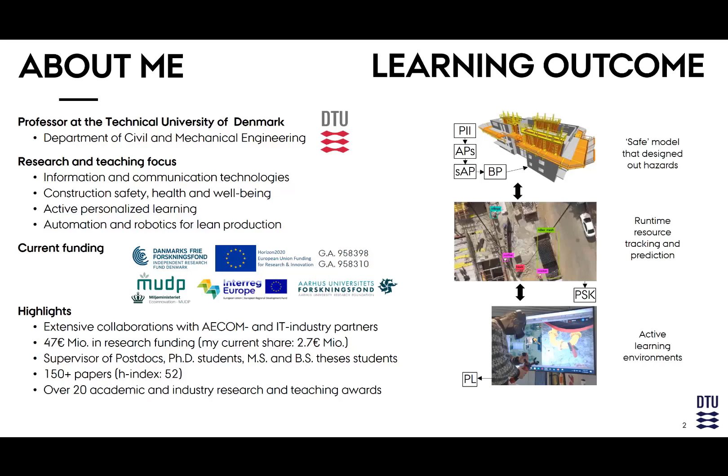I have achieved my learning outcome today if I get three key messages across. One is prevention through design and planning. Second, proactive feedback. And third, active learning environments.

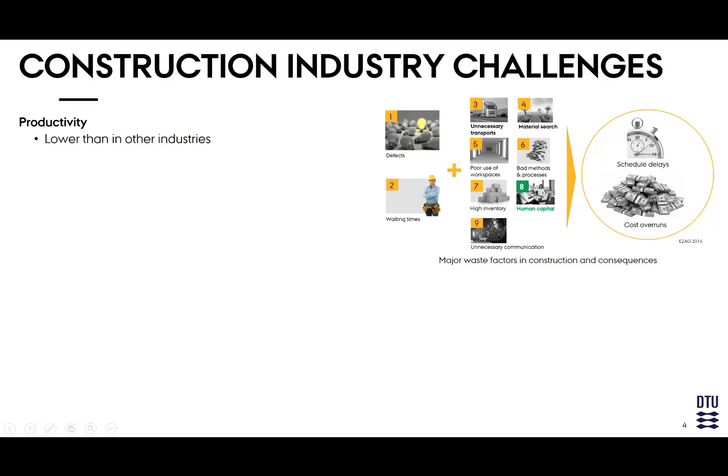The motivation for my research is multifaceted. The industry faces challenges, and I'm not going into those details about productivity, emissions and waste, an aging workforce. But mostly related to this presentation is the content and the methods that we have available for work. The current safety management practices are not really built for the digital world that we live in. They're stale, they're static, they're often not meant for interdisciplinary work experiences.

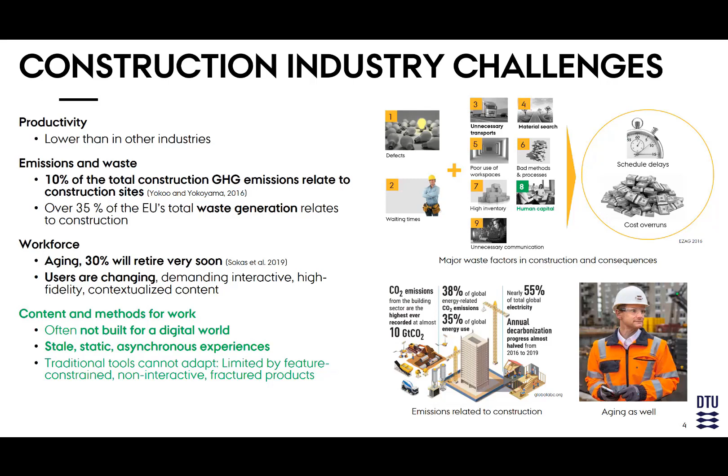And this is the reason which brings me to the topic of zero accidents, and we all want to achieve it. As we have heard probably earlier, safety statistics is a very delicate topic. We may not be able to rely and trust them fully. However, they give good indications of the current state of safety in our organizations.

I typically like to show this graph because it shows us safety has been improving over several decades. However, in the past couple of years, it has been stagnant in reducing accident numbers.

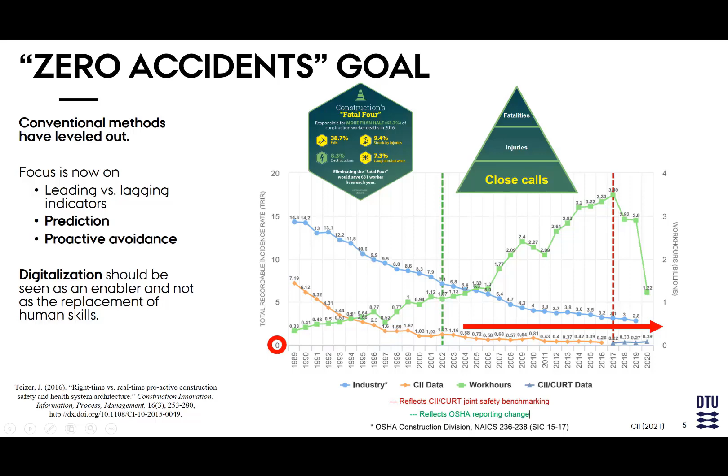We also know that we have shifted focuses away from lagging towards leading indicator and data collection, and recently also towards prediction. I'm a big fan of proactive safety that actually tries to prevent injuries in the first place. And this is where digitalization comes in. It should be seen as an enabler and not as a replacement of human skills. This is very important.

Maybe a little bit on safety in Denmark. Denmark has a much smaller economy, and still we experience 5 fatalities every year. A lot of apprentices are involved in accidents. The Nordic countries in particular have overall better safety records than many other countries around the world.

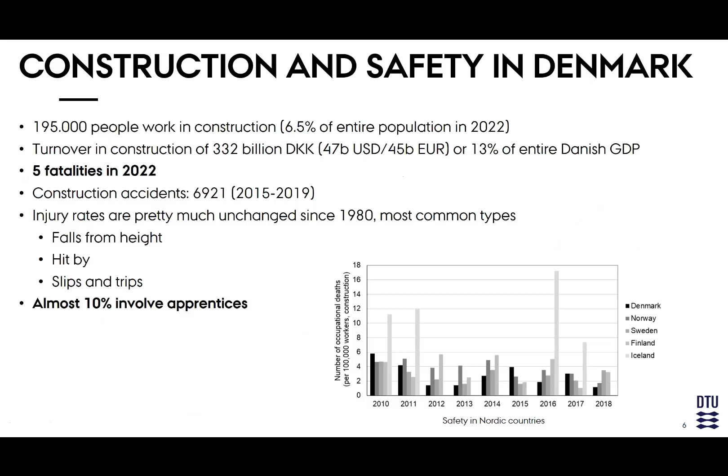Of course, we know we have high-level control theories from the owner and the organizations buying into safety, all the way down to providing worker training, safe work environments, and personal protective equipment. And that's why we need to embrace the term digitalization. I have added this as another layer of protection, and I think this is a good way of enhancing this diagram that was established about 30 years ago.

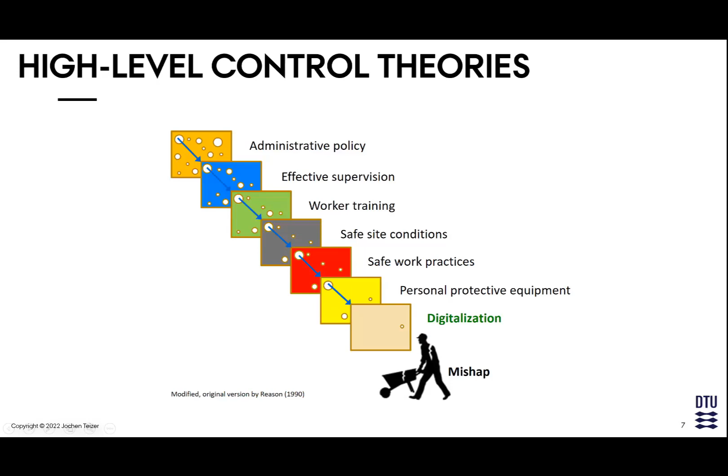And why is that important? Because we still see these in infrastructure projects in Europe. Railway construction on the left-hand side. This is a whiteboard where we coordinate equipment and work crews as they replace rail tracks. On the right-hand side, you see an embankment of a bridge.

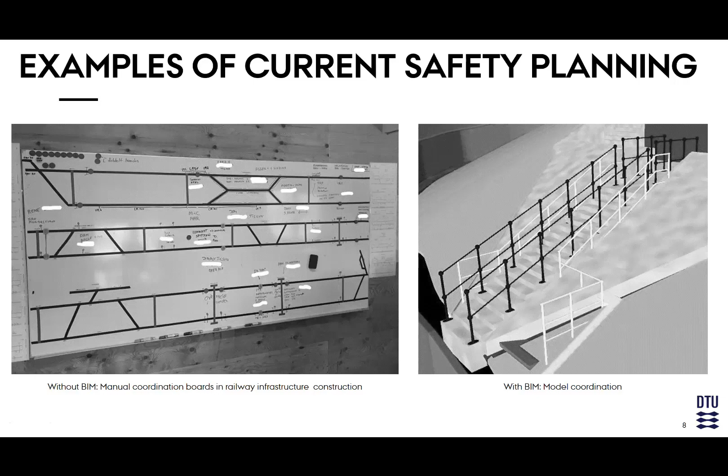Even though we use building information modeling, model coordination is a big challenge. Actually, 2 design crews have actually modeled a guardrail, one completely off, the other one almost perfect. But we see this all the time when we deal with building information modeling. The reason is it's done manually and not really in an intelligent way, requiring a lot of rework, wasting resources. We want to invest somewhere else.

The current state and roles of occupational health and safety in BIM, unfortunately, does not have yet the prominence than other specialties have in BIM. There's no systematic approach where lessons learned and good practices are being shared using BIM for occupational health and safety, or prevention through design and planning. Often, there's a lack of statistical-based instruments and databases that support which areas to focus on.

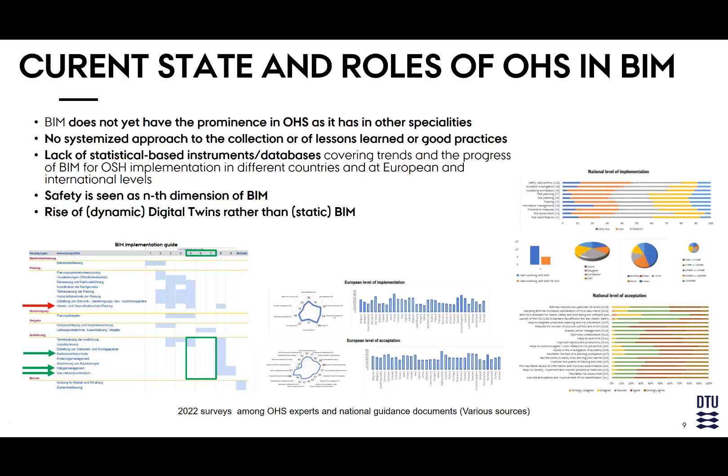Recently, the term digital twins has come up, and I like it because it includes this dynamic character of also involving the construction phase. So let me introduce you to my thoughts on digital twins for construction safety.

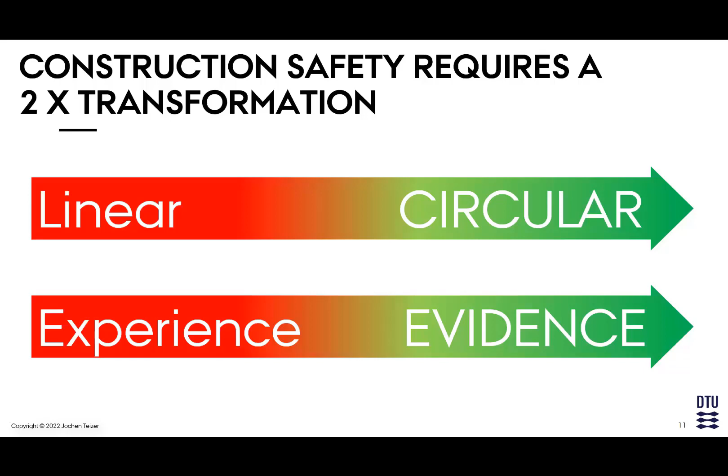First of all, construction safety requires a double transformation. First, safety is top-down typically. It's linear, and I think we need to embrace a circular approach. Secondly, all of our experience-based safety management is great, and it has shown effect in the conduct of safe workplaces. However, we also need to move away and towards evidence-based safety.

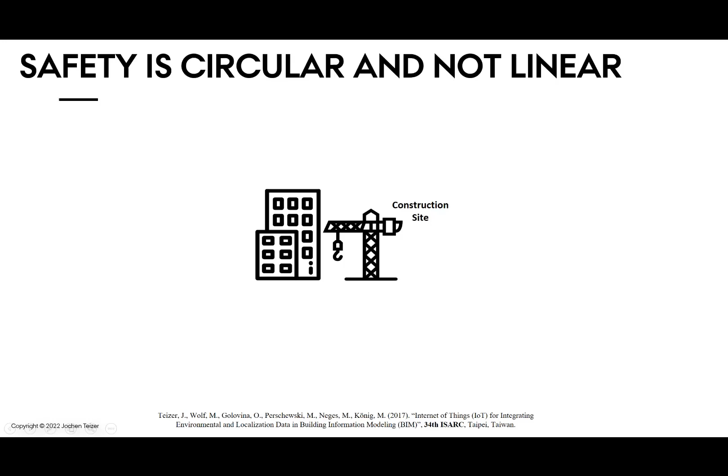Let me explain to you this chart I created 15 years ago. Back then, nobody called it a digital twin. This is a construction site. We want to actually utilize building information modeling for designing out hazards, because we have many rules and best practices that we can simply apply to building information models.

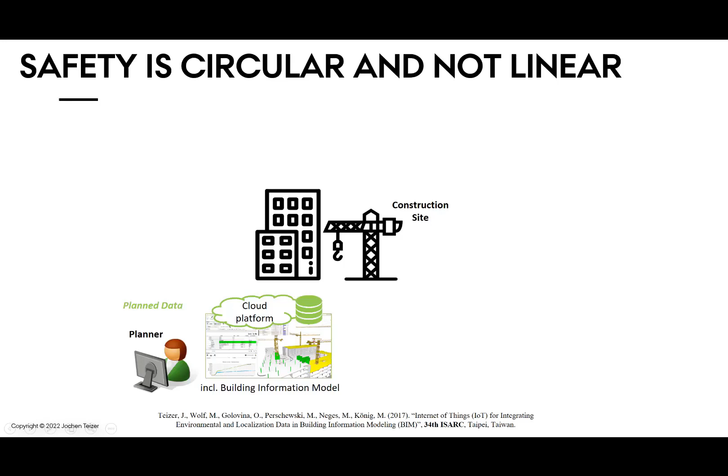We want to assign workers and give them experience-based certificates to carry out work, provide them with the adequate temporary equipment to ensure their workplace is safe, and give them the right instructions and the time and the positions where their material and themselves have to be.

The trades also have smart mobile devices to record the actual status of the project or task they are performing, but also to report back if any issues arise, like a close call. We can debate whether this should be done through a mobile interface like a smartphone or not. Some allow it, some do not. In the end, it doesn't matter. You can still use reporting cards if they are convenient for your organization.

However, think about the aging workforce and the one that is coming right after. People like to use mobile devices. Now, this information is actually being recorded, preferably in an automated way, and shared with the safety and construction management.

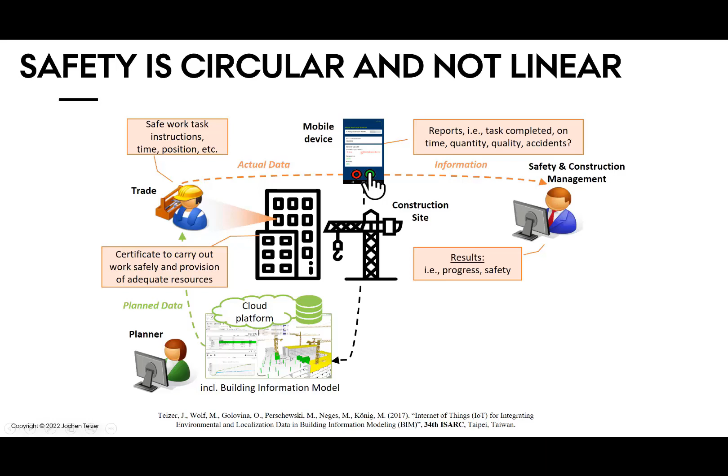So from actual data, we go all the way towards information. We get raw data converted to information, but information yet is not really useful for us because we would like to get knowledge to improve our next project. But we don't want to forget, we want to also treat our workers nicely. Well, why don't we start doing that actually and giving workers additional training? Thinking about active learning environments where they get personalized feedback.

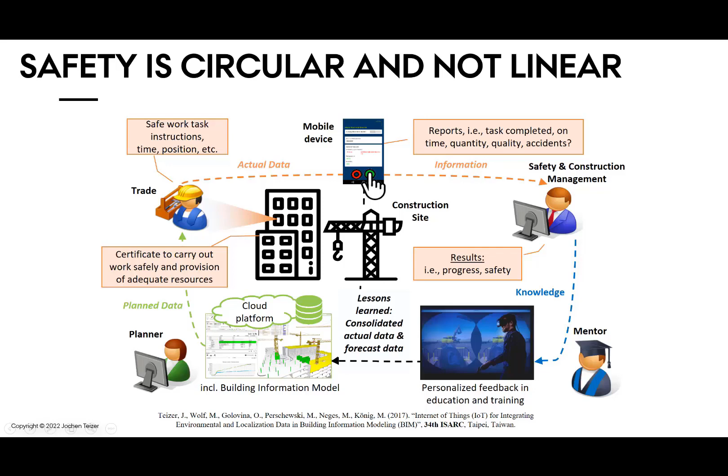And this is what we try to do here as well, using, for example, virtual reality, but also 3D—just 3D games are often just enough. So these lessons learned from the project as well as from training environments can be fed back to generate the next safe project. So this is in a very graphical and simplistic way what we want to do.

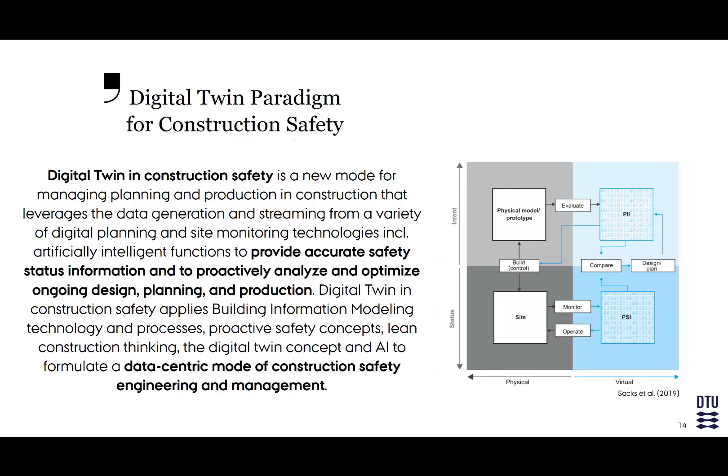And the technology, honestly, it's almost there to get that done. So digital twins—this is a replication of the real world, streamed into a digital world, but not just to visualize on a screen in 3D what the real world looks like. No, it's more than that. It actually is there to predict and avoid future accidents from happening.

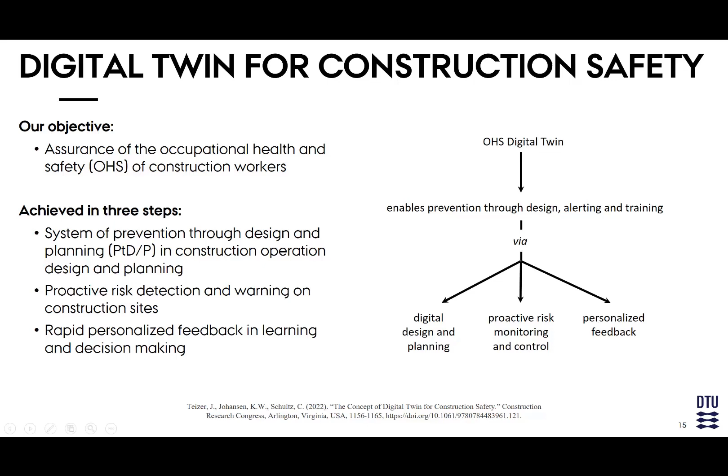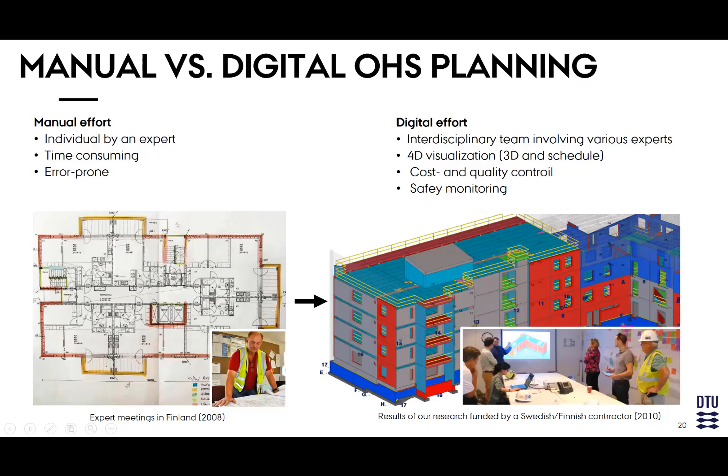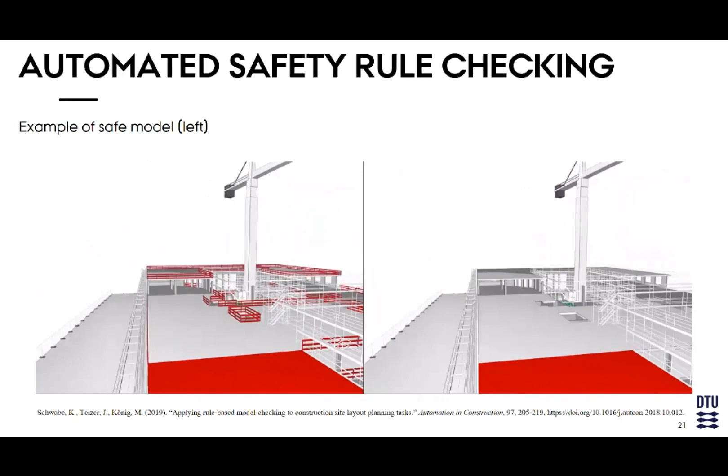You see here a video on the right-hand side without guardrails that have been automatically modeled. On the left-hand side, you see it. Well, if you think about clash detection, it's very similar to that in building information modeling. We have safety rules; these safety rules are applied to the model. Here we have a benchmark model with various cases, various challenging cases for the algorithm, at least.

You see here, this is the raw model, and here you see already the guardrails that have to be applied according to certain rules. For example, in this little space, you're not supposed to work because it's too small for you to work effectively. So there's a lot that goes into actually extracting the geometries and extracting workspaces and fall spaces.

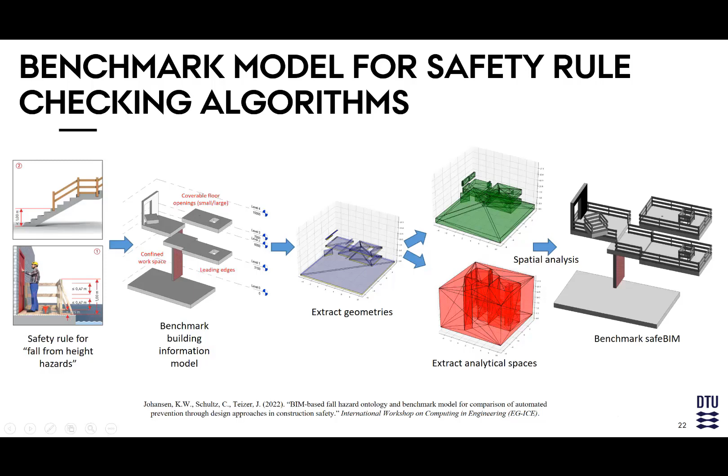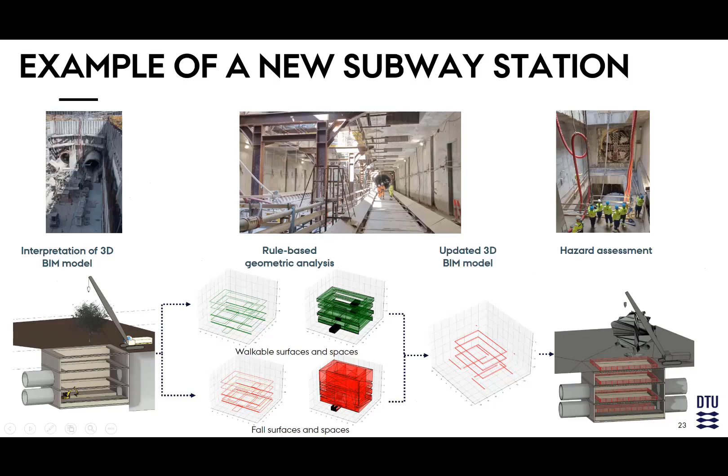Another example for safety rule checking for infrastructure projects, this time a subway station. Again, it relates to fall from a shaft, which you see here on the right-hand side.

Other examples for construction site layout plans: here you can see that cranes are too close to the excavation pit according to the safety rules that exist in Germany. They need to be moved a little bit back so they don't fall into the pit. Here on the right-hand side, you see an internal traffic control plan that can be created, separating worker paths from vehicle paths. Again, where are those safety plans that do that automatically? And for every project, it would be a dream to have that.

Even here, temporary storage areas where you see crane swings occurring, crossing a pedestrian pathway. Well, you have to come up probably with alternatives.

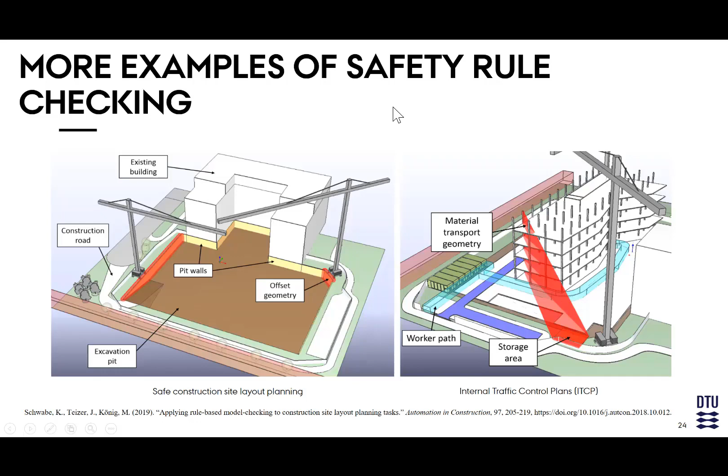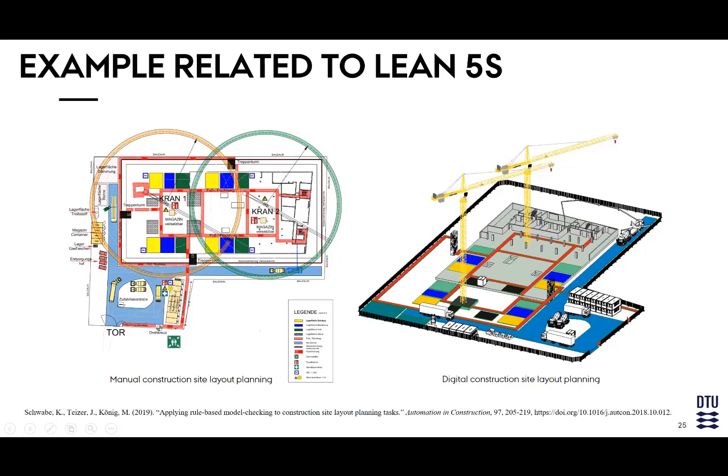And this can be done easily once you start applying safety rule checking. With our friends from the lean construction domain, you guys are very good in terms of creating productive work environments, but where's your approach of involving safety and getting this done quickly with building information modeling? Here's a plan that was done manually in 2D, and here is one done using building information modeling.

Still very rough, but again a first indication of getting your job site safely organized. Now let's move to the next step, conformance checking or compliance checking. Let's stick to this example of guardrails. We have here a raw model. It would be beautiful if every project gave us the requirements for fall protection, whether guardrails, hole covers, or other temporary assets needed. That, first of all, doesn't exist based on known safety rules.

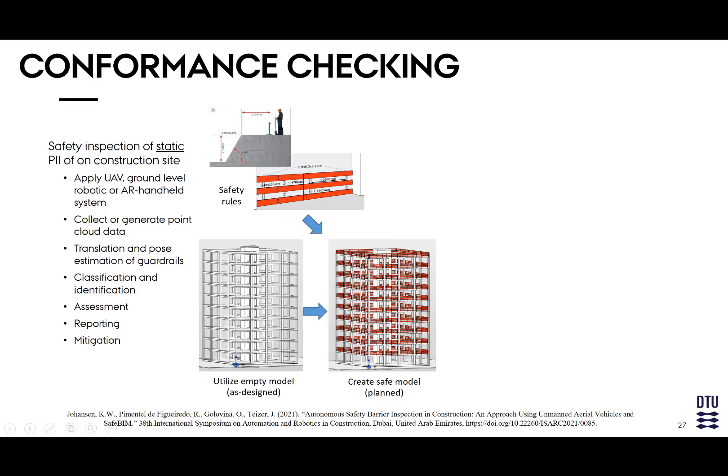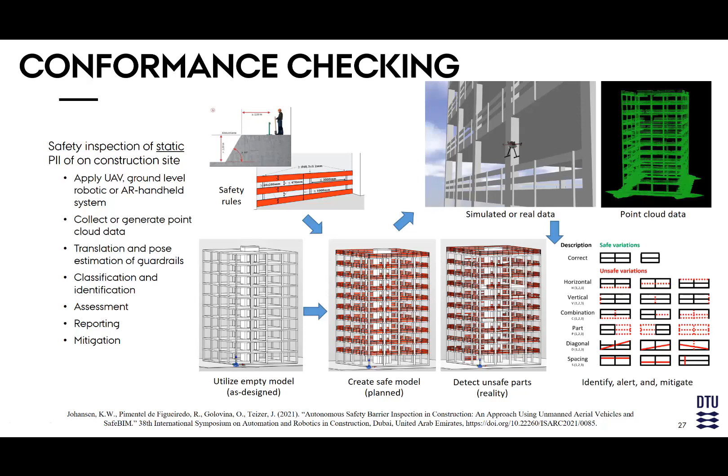Now we can actually apply tools like drones or photogrammetry to collect and generate point clouds, and then apply other algorithms that can check where discrepancies occur. Here we have another model generated based on certain elements where we removed guardrails and then flew the drone in a simulated virtual world, and the algorithm can detect all of those issues. A next step will be to fly the drone in reality and compare it to the original safely planned model. I'm very confident this will create big success in getting safe modeling and safety monitoring actually done. It's not challenging with the tools and technologies that exist today.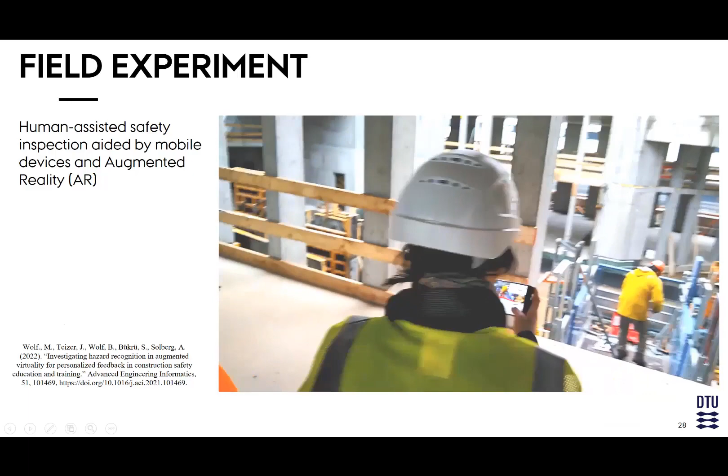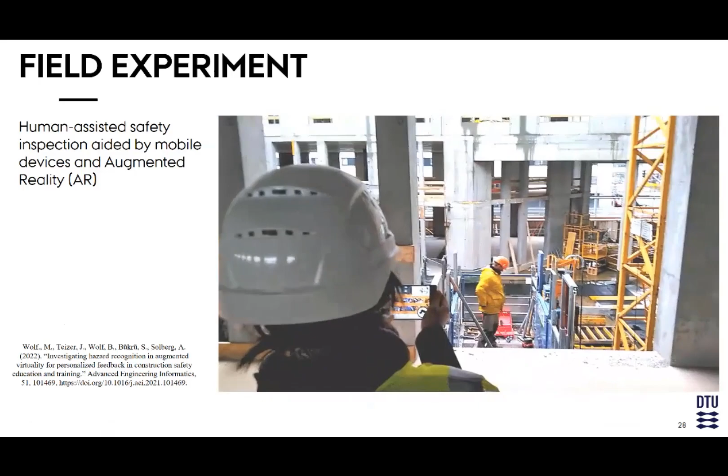Here is an approach of augmented reality. Here you see an engineer. She uses a smartphone to detect that there is a guardrail missing. She manually detects it and asks, well, something should be there. And she draws the information, pulling it live from the cloud.

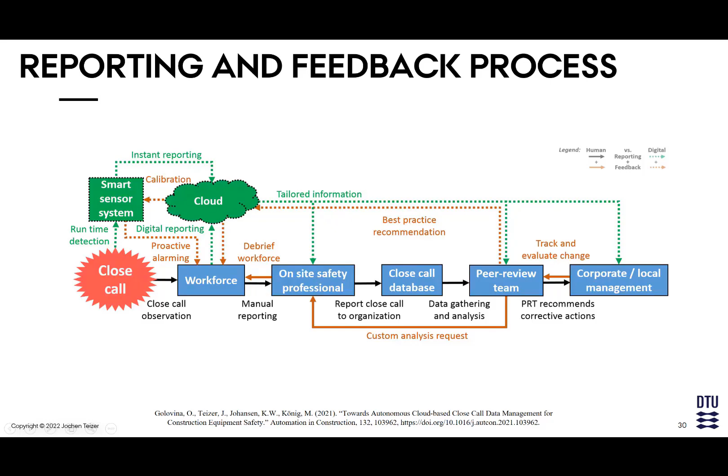Now let me move to the third part, runtime safety monitoring and alerting. We have also looked into the feedback chain. When close calls occur, typically the workforce sees or experiences it, they report it, and maybe it gets entered into a database, and maybe then there's a peer review team in certain organizations that report it to corporate or local management. At some point somebody will make a decision and it will come back to the workforce, but most often it does not. It's very discouraging. We thought about deploying technology that uses smart sensors that can also report, in addition to a human, such situations, and process the information to involved stakeholders, generating feedback that is more encouraging to the workforce to continue.

How does this work? We were among probably the first to deploy tracking technologies on the workforce, maybe just for short-term monitoring. We want to ensure GDPR requirements in every country, of course. But it would be cool to deploy such technology on a regular basis to give people a sense, hey, we care about you, we really care about you, and give them feedback on whether they are actually performing well or not. So far we've had very good experiences with unions, for example in the United States, the UK, or even Germany, where they sometimes embrace the use of such technologies.

But regardless of that, in building information modeling, we can very well define work areas and hazardous areas. For example, here's an area where a mobile crane is wheeling steel girders into place, and there is a masonry crew working, and this masonry crew has to travel to a saw. As a matter of fact, we see already some issues with site efficiency. On the other hand, as you can see here, recording all the trajectories, we see a lot of proximity events where the crane load got somewhat close to workers. In such a case, such a job site should probably be temporarily halted, and people should be made aware of this issue, that there are two competing work crews.

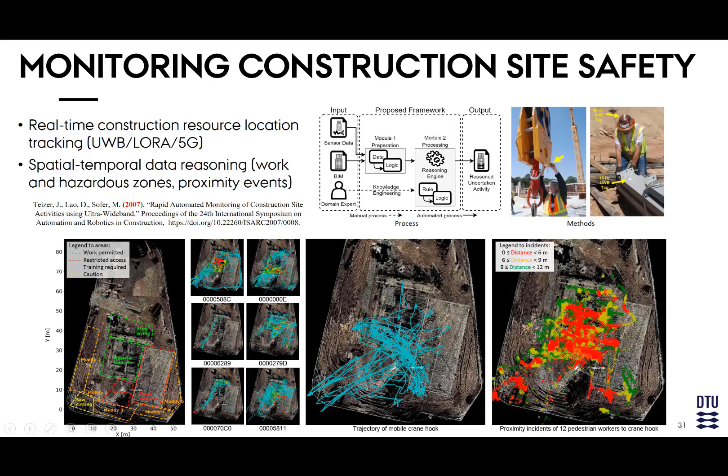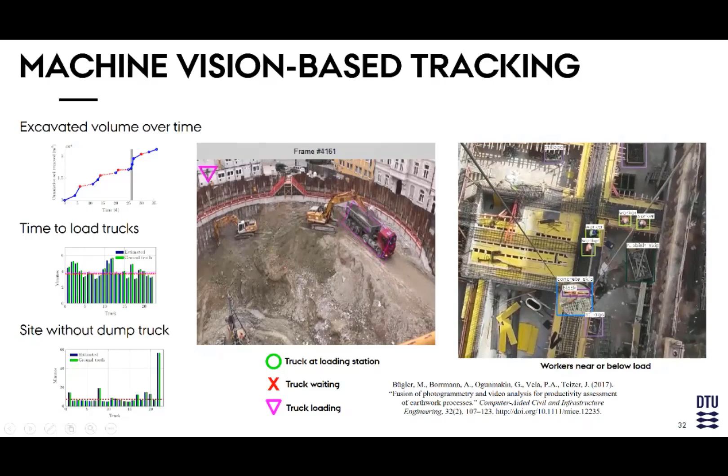Again, all of those red dots indicate a proximity between the crane load and the worker, not necessarily a close call, if I may say. Now, this was done with radio frequency-based technology, wireless, not RFID tags, but ultra-wideband technology. You can also use vision-based cameras. Here we track the productivity of dump trucks arriving for an excavation project in downtown Munich. On the right-hand side, you've seen already a tower crane camera installed on the trolley, watching downwards. And in our research, we are well able to detect and track workers being too close to the crane load.

It's absolutely fascinating what technologies exist that we can leverage for safety purposes. I don't have time to go into those details. We have done a lot of work with blind spots or blind spaces for equipment operators. We developed and worked with companies very early on that typically work just in underground mining operations, to bring this also above ground level. And yes, several of you have experienced it and may criticize the use of such wearable tags. And absolutely correct, they have benefits and shortcomings.

In certain situations, some of these approaches actually have a lot of impact. You can see here a wearable tag that notifies a worker when they get too close to a machine. There are certain zones you can calibrate, and as soon as they enter, maybe the worker gets an alert, or the equipment slows down and stops. A recording can happen, logging this data while complying with GDPR requirements, because we're not interested in knowing who it was, rather the information about the event.

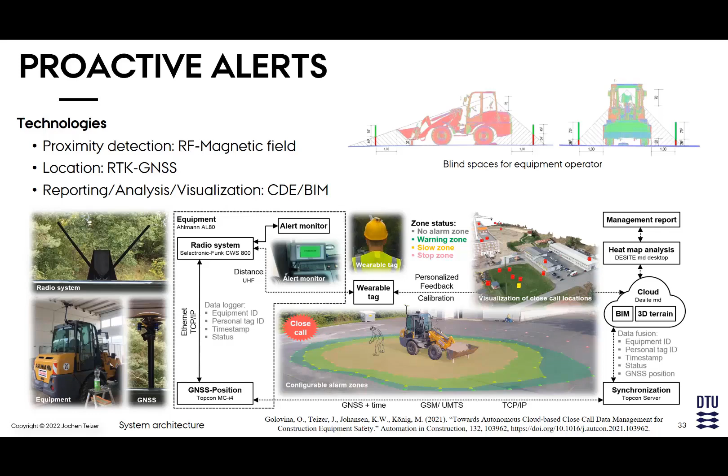I'll show you a test we've conducted demonstrating that this technology works. Here you see an image of a terrain model, with the BIM model superimposed. On top of that, we've visualized the data, and this is happening in runtime. Anytime an event occurs, you see a little cube appearing. If the cubes accumulate in certain areas over a certain threshold, they turn into a different color, yellow or red.

Here you see the parking space that was also traversed by equipment. They had an issue there. Then they separated the walk spaces of the pedestrian workers from the other traffic, and suddenly it didn't occur here anymore. Same over here on this part of the site. For workers themselves, you may have a feedback card, maybe on a weekly basis, telling them how often they got too close to equipment.

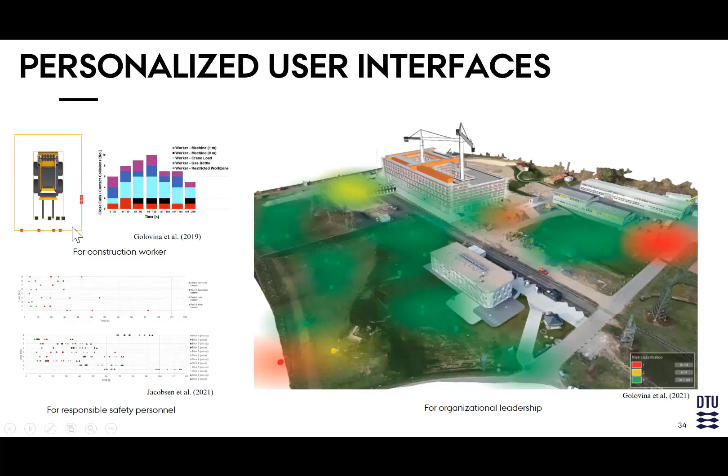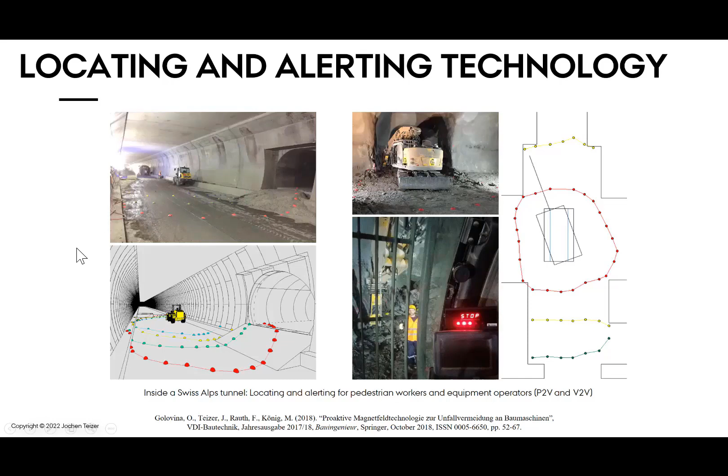A project we've done in the Swiss Alps with a contractor shows the technology works reliably, especially in such environments. We've also done this with a contractor currently in our European Union funded project, where we record data about machines in railway construction. There we predict the movement of machines as well as proximity to workers around the vehicle, or the reach of the vehicle into neighboring railway tracks, which should not actually occur. In this particular case, the track is completely under construction, so it's not a problem.

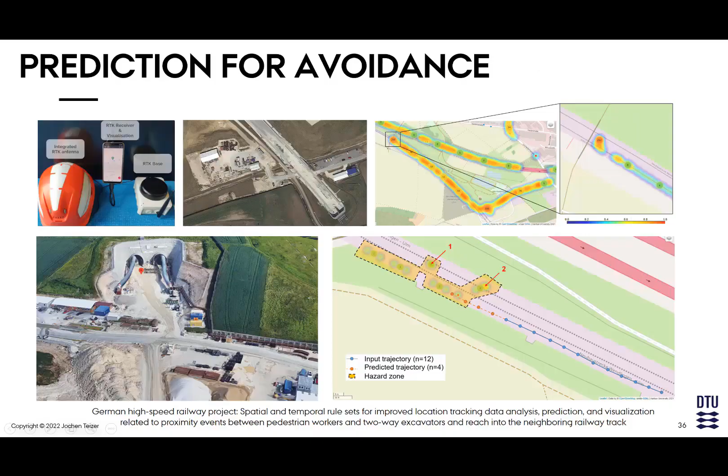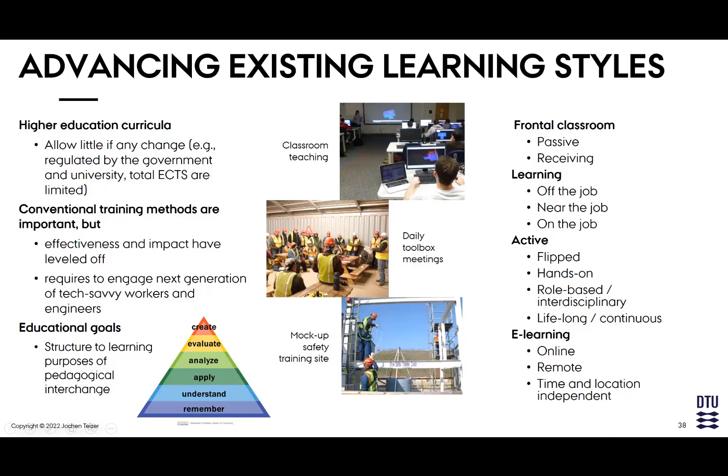Last but not least, let me come to this point of advancing our existing learning styles. We all know this, and I participate in those toolbox meetings myself, or even mock-up safety training sites. I very much like it if those exist, but it's rare. You need a certain size in a project for that to happen. Actually, we want to get away from some of the top parts here of how we learn, like reading text or attending a lecture.

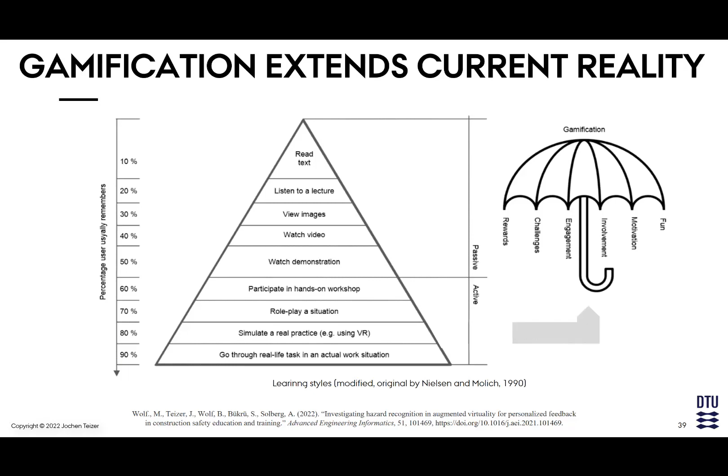I'm not necessarily saying that virtual reality is the way to go. It's challenging for an experienced workforce. For the younger generation, they typically embrace it quite well and quickly. Of course, there are issues with VR sickness. About 10 to 15% experience it, whether they acknowledge it or not.

However, we've created more than virtual reality. We've actually created augmented virtuality. This is a slightly different term, because we augment the virtual reality with devices that you hold in your hands. We simply gutted it, made it dysfunctional physically, but functional for the virtual reality experience. So when you turn on the button of the angle grinder, it actually turns on also in this virtual reality scene.

And the case here is actually a true case where we experienced, in Germany, a fatality at a chemical processing plant where a worker cut into the wrong pipe, and I think it was 4 or 5 workers who got killed instantly. As you see here in this video, the participant actually turns on the angle grinder.

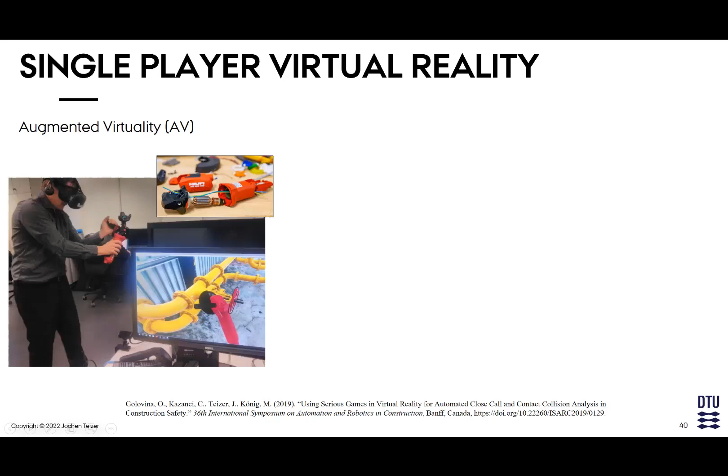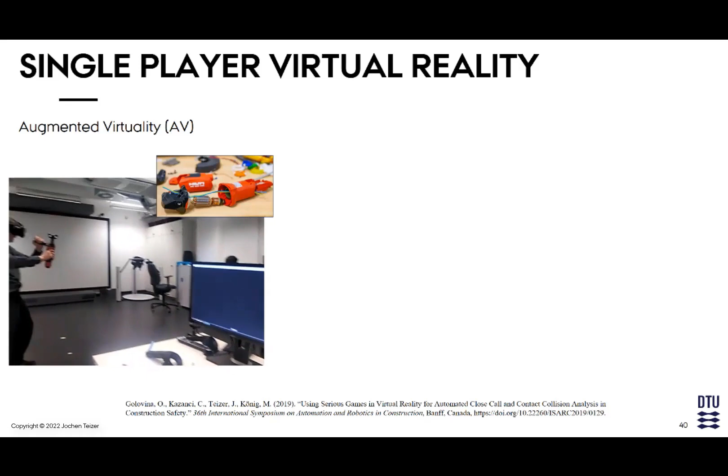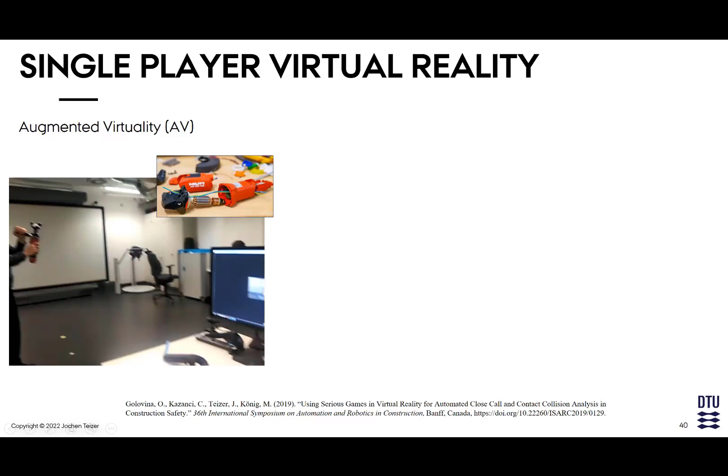Now you see only a part of this setup. The entire scene includes multiple hazard recognition and rectification exercises. This environment that we've created is actually built on a building information model of a shop floor or machine shop that relates to an oil and gas processing facility. Workers are being trained to recognize certain hazards, making sure the workplace is safe. It has shown effective for workers to get such training.

What we do is we don't use virtual reality just as a visualization. We take virtual reality to collect data about the participants as they experience these unsafe and safe virtual reality environments. You can see here little dots. All of them are visible to the trainer and give us indications of how well a participant has done. And then we can share valuable feedback with them.

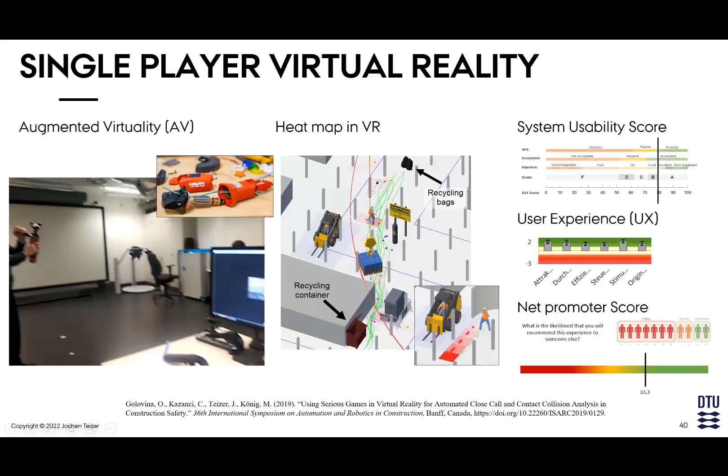We have numerous environments that we've created ourselves. We've worked with vocational schools to ensure they are targeted for specific safety education and training environments. Our usability, user experience, and net promoter scores are quite good.

Now, summary and outlook. I'm embracing research together with industry, I cannot say it more. We need you guys. We are truly excited at the Technical University of Denmark, as well as other universities around the world, the many that you have in the United States or elsewhere. It's currently very much focused on technology and digitalization as the enablers. But I don't want to shy away from any of the safety management research that's happening, because the human factors and the work environment still have a lot of things unresolved.

I said already, your world is our laboratory. As much technology as we utilize, it's all about the humans in the end. Thank you very much.